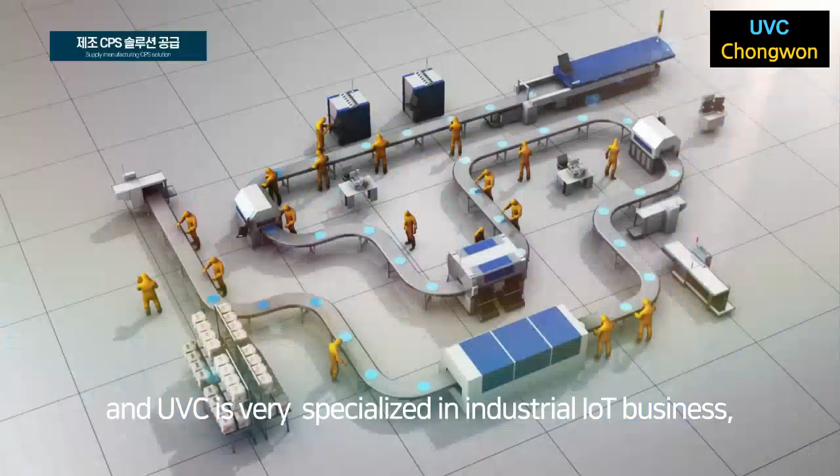UVC is one of the founders of OPC UA, and UVC is very specialized in the industrial IoT business, as a developer and supplier of IoT and CPS solutions for smart factories. Our digital twin cloud platform connects real and virtual in your industry.

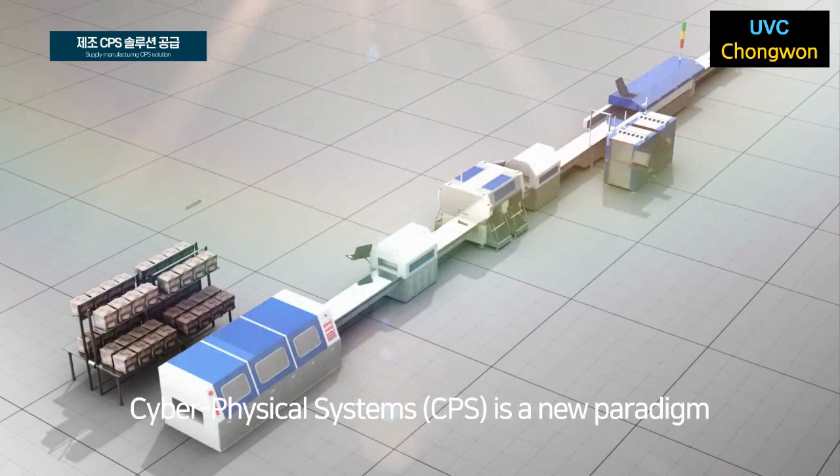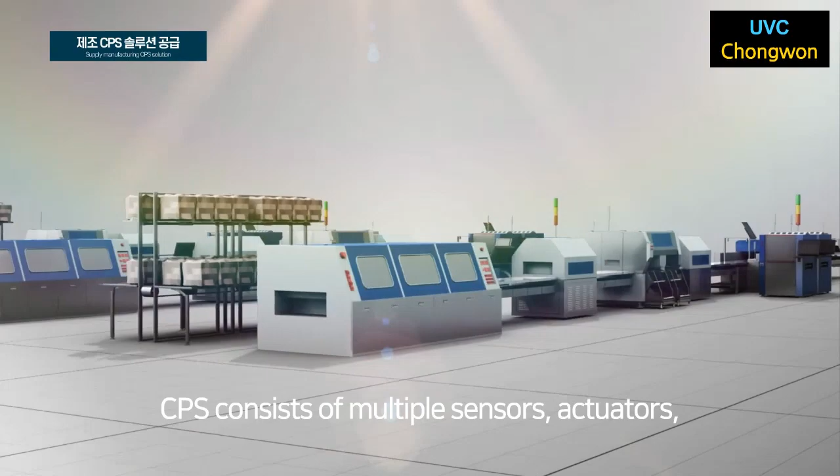Cyber Physical Systems (CPS) is a new paradigm that seeks convergence between the physical world we live in and the cyber world. CPS consists of multiple sensors, actuators, and control devices connected by a network to form a system of systems,

and acquires, processes, calculates, and analyzes physical world information and applies the results to the physical world through the actuator system. This focuses on actively adapting to the changes that occur continuously.

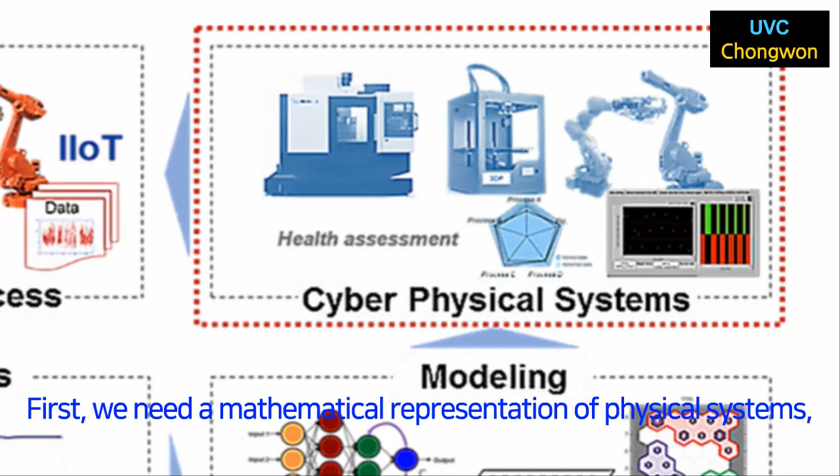CPS differs significantly in that it focuses on how physical systems can be controlled in real time, with high reliability, beyond simple connectivity. First, we need a mathematical representation of physical systems, the so-called modeling work.

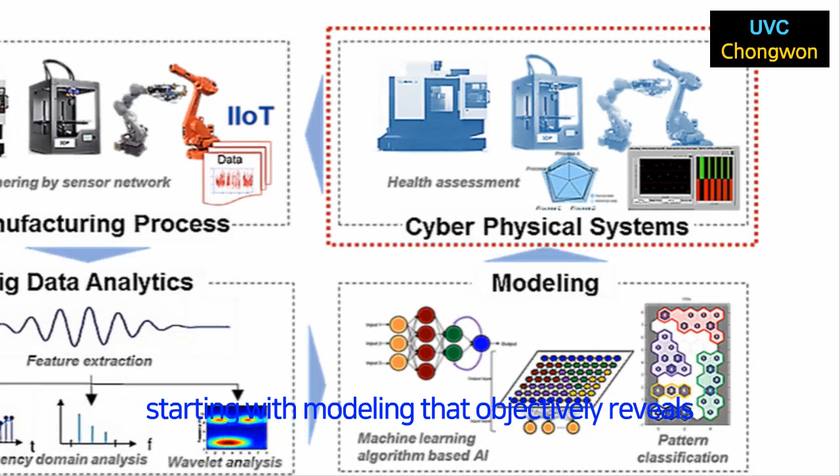Eventually, we need to accurately model complex interactions and dependencies with physical systems, starting with modeling that objectively reveals how humans control and interact with the physical world surrounding us.

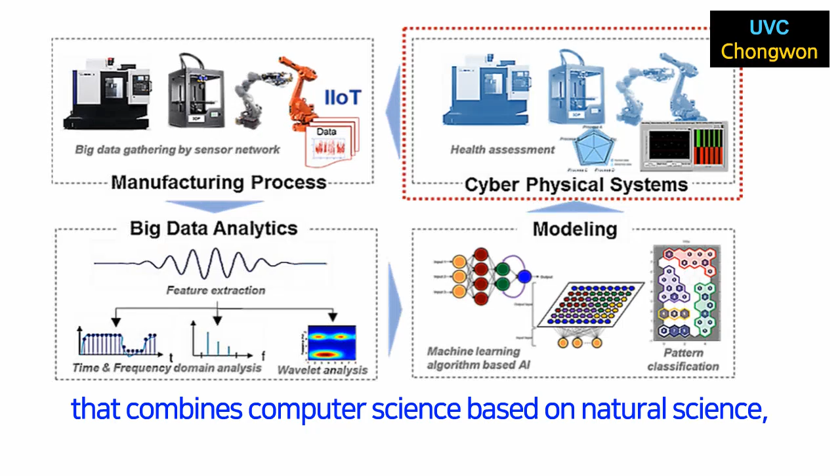This requires a new fusion and complex technology approach that combines computer science based on natural science, not just an understanding of existing control systems.

Smart factory is different from simple factory automation. Factory automation is automated and optimized for each unit process, and there is no connection between processes. The main difference is connecting data from all processes and facilities in the factory.

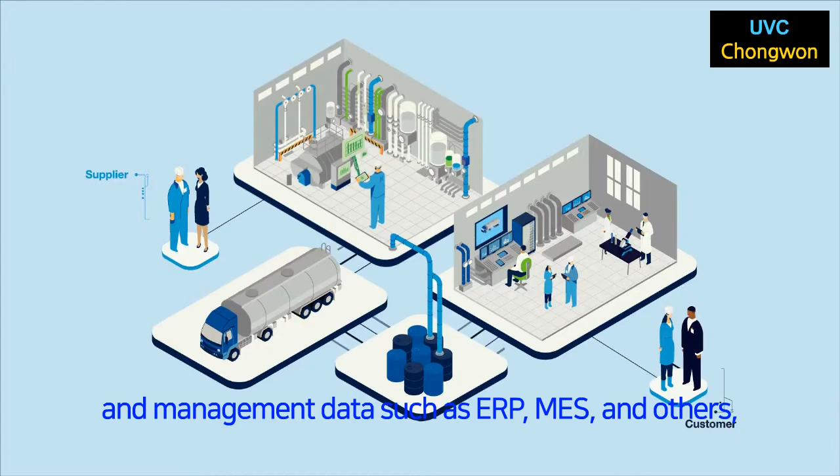In addition, by fusing sensor data with production and management data, such as ERP, MES, and others, management and judgment can be directly reflected to the factory's production equipment.

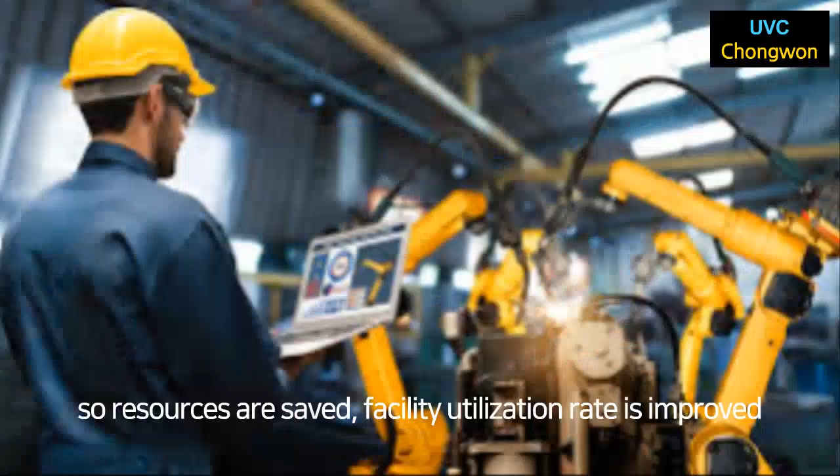Using a smart factory, energy and materials optimized for factory operation are used, so resources are saved, facility utilization rate is improved by preliminary inspections through predictive maintenance for possible facility failures, and it enables factory operation that is automatically linked to production and management plans.